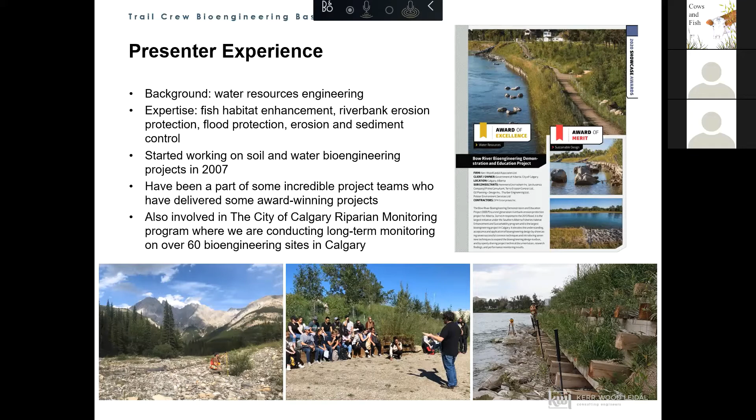I've also been part of some incredible project teams who have delivered some award-winning projects. An example shown up on the top right here is called the Bow River Bioengineering Demonstration and Education Project. I'm also involved in the City of Calgary Riparian Monitoring Program, where we are conducting long-term monitoring on over 60 bioengineering sites in Calgary.

Before we go further, let's briefly define what bioengineering is. A very simple definition is that soil and water bioengineering is the use of living plant materials to perform some engineering function. Typically, bioengineering is used for riverbank erosion protection or to stabilize eroding slopes.

So you'll note that I have soil and water bioengineering listed here, because if you search for bioengineering in Google, you'll get back a whole lot more of the medical side of bioengineering. So there's a few terms that are usually placed in front of bioengineering, such as soil or soil and water, that define it for what we're talking about today.

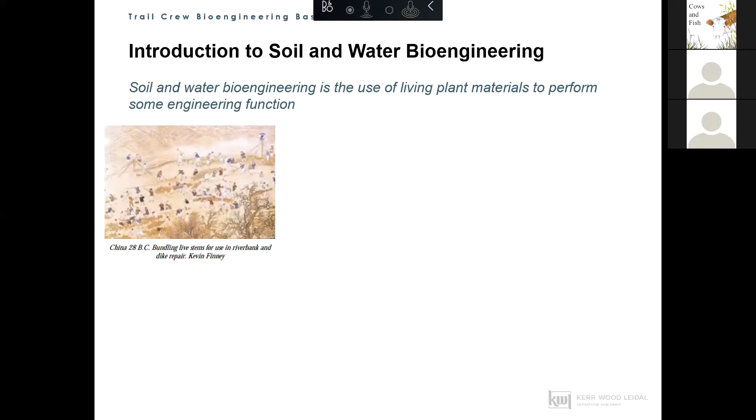It's important to note that bioengineering approaches aren't new. For example, Chinese historians recorded the use of bioengineering techniques for dike repair as early as 28 BC. Bioengineering has been documented in Europe since the 1600s. The Acadians were building bioengineering structures such as living dikes, known as aboiteaux dikes, and sluice boxes in the 17th century on the east coast of Canada. And there's documented use of bioengineering techniques in the US since the early 1900s.

So we're on a bit of a path of rediscovery here, where we again realize that the bioengineering approach helps us achieve the goal of reestablishing a native plant community that will provide permanent erosion protection and stabilization that can self-repair and regenerate and achieve habitat, biodiversity, climate change, cost, and aesthetic goals. Ultimately, a good bioengineering site will allow natural processes for recovery to take over.

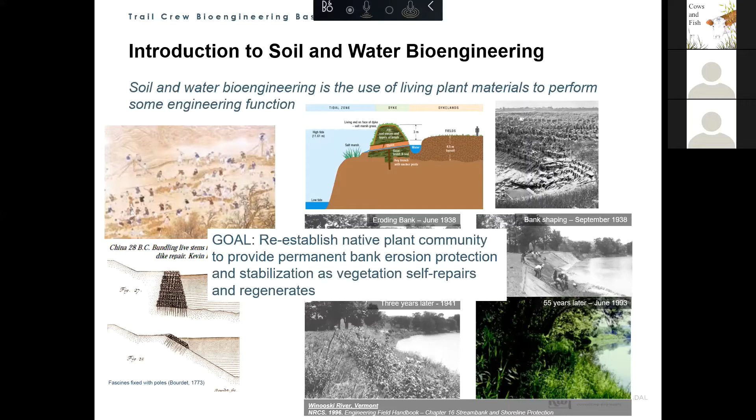I've done a bit of research into the history of bioengineering in Alberta. It's by no means complete, and you might have some names or events to add here, but I thought I'd share the key bits that I've learned so far. It appears that reclamation and restoration using bioengineering methods were introduced in the 1970s in Alberta. A key figure of this era was Nick Horstman from Western Canada Erosion Control, who was doing reclamation work in coal mining areas of Alberta.

In the mid-1970s, he developed a relationship with Dr. Hugo Schiechtl, who was an Austrian soil bioengineer and one of the most influential figures in the modern era of the practice. His writings remain some of the most important works in the English language. Dr. Schiechtl came to Edmonton to visit Nick Horstman in the late 1970s, and it was thought that they came up with the idea to translate some of Schiechtl's work and other important European soil bioengineering work into English. And this became Bioengineering for Land Reclamation and Conservation, which was published by the University of Alberta Press in 1980, and is a key text for bioengineering in the English-speaking world.

The pipeline industry was also an early adopter of bioengineering to repair watercourse crossings. A leading edge pipeline watercourse crossing course, a manual that featured bioengineering techniques, was developed in the early 1980s by the Petroleum Industry Training Service, and in part delivered by Pisces Environmental, that ran until around 2006. Attendees came from across North America to learn about bioengineering, and the course was presented to several large pipeline companies in the US and to the US Federal Energy Regulatory Commission in Washington.

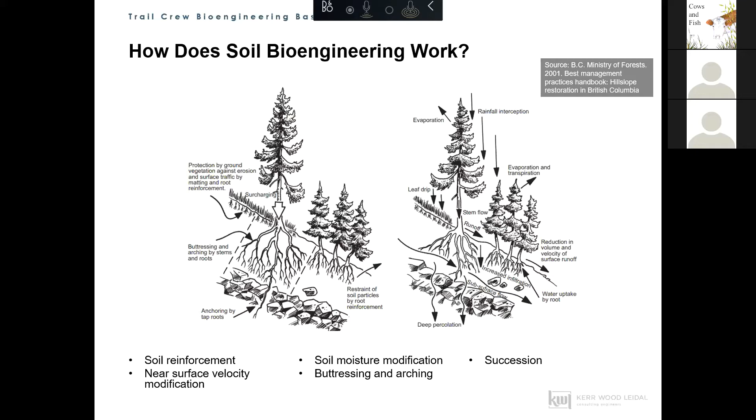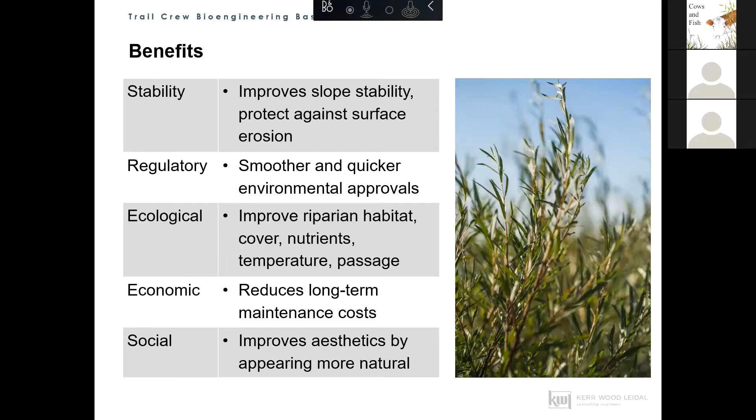With respect to regulatory processes, for someone who submits these applications like I do, this is an important consideration: bioengineering offers several advantages over conventional approaches such as riprap. Bioengineering has lower risk to fish and fish habitat, lower complexity of fish habitat assessment needed to support a regulatory application, a shorter duration of project review, and a lower amount of offset required by DFO. Additionally, some jurisdictions, such as the City of Calgary, require bioengineering approaches or justification as to why they have not been used.

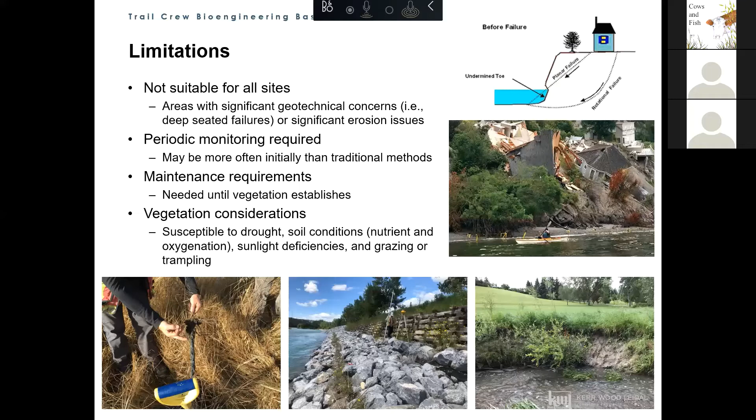And there's a soil cigar that was planted with live cuttings, with very low success of the live cuttings in that soil cigar. Grazing and trampling can also limit vegetation success.

So now that we've covered what bioengineering is and its benefits and limitations, let's discuss what we need to know about a site when planning a bioengineering project. Firstly, it's very important to develop a good site-level understanding of the conditions and processes occurring at a site, so that an appropriate solution can be identified that will properly address this erosion problem. There's nothing worse than spending a bunch of money to fix a problem to have the problem pop back up again.

So now, bioengineering project planning starts with having a good understanding of the objectives. So you might ask yourself, what is this project attempting to achieve? Is it stabilizing erosion in a creek or stream or on a slope? Or is it for habitat or riparian health enhancement? Is it aesthetics? Or is it mandated by a regulator? It could be a combination of all of these. Defining clear project objectives at the start of the project allows for the development of appropriate solutions, and then also allows to evaluate the success of that project at its completion.

So next, it's important to gain a good understanding of the site conditions and factors that could limit the success of a project. For example, what might limit the growth of vegetation at the site? Aspect, precipitation, soil moisture regime and groundwater seeps, existing vegetation and weed species, existing erosion, wildlife browsing or trampling, human or dog use, vehicles, boat use, etc.

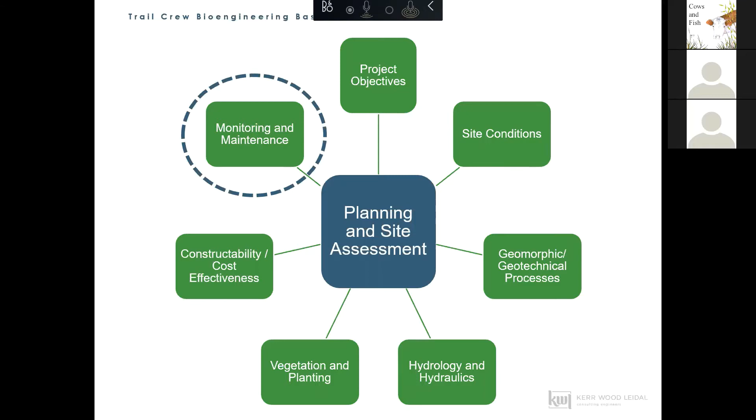I thought it might be useful to go over more specifics on what a site assessment should cover using the West Bragg Creek site that we're working on Friday as an example. So things that we'd want to document when we are looking at a site are, firstly, to confirm and verify the project goals. So for example, if the goal is to stabilize an eroding slope, it's important to verify that a bioengineering approach will work, or that it is needed based on how the natural system is responding to the disturbance.

The water flow patterns in the creek or stream or overland flow patterns, particularly the flow direction based on the site topography, and if you can get a sense of the volume and potentially the inundation duration. The presence of any seeps or groundwater issues should be noted. We'd also want to take a look at undisturbed areas to get an understanding of how they are functioning and possibly use our observations to support a design. Erosion features such as bank erosion, surface rilling, gullies, and slope instability and the potential causes should be noted.

Existing vegetation species and the distribution at the site, also noting the vegetation trim line, as mentioned previously, if the goal of the project is riverbank erosion. We'd also note invasive species and insect damage on the native vegetation that may be a concern for our treatment in the future. We'd want to note the aspect to observe how warm the site might be and also shading, potentially from buildings in an urban setting or existing vegetation in a more natural setting.

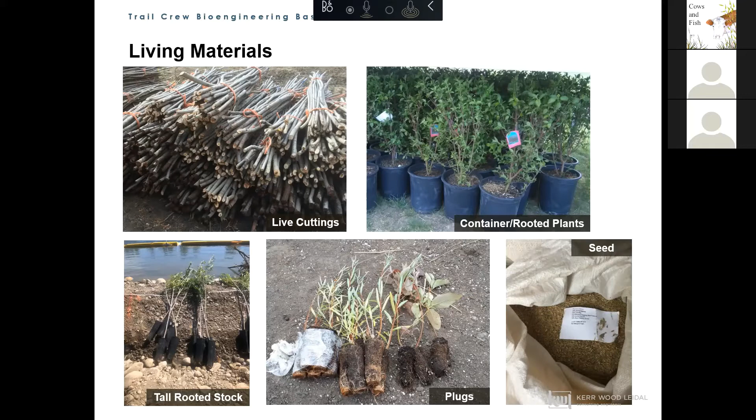So the most common species used in bioengineering are from the willow and poplar families. And the main reason for this is that these species have several beneficial properties for use in bioengineering. They grow in most moist soils of riparian areas and wetlands. They are resilient to high velocity floodwaters, burial by sediments, long periods of inundation, and high winds.

One of their coolest properties is that they root from cuttings, as I mentioned previously, because they have adventitious buds with flexibility to form roots when in contact with water or moist soil. So adventitious buds are buds that develop in an atypical place rather than at the branch tip or in the leaf axils. So along the stem, for example, as shown in the photo on the right here.

This strategy is super helpful in disturbance-prone environments such as riverbanks, where flooding or erosion or beaver activity can cause a branch to become dislodged or float away and flow down the river, where the stems can then readily root in the muddy riverbank. For bioengineering projects, we can use this property by harvesting and installing cuttings during the dormancy period, when the cutting has its highest amount of stored energy that can be then used to grow new roots and shoots within the growing season without the ability of photosynthesis. So that's super cool, I think.

But also, in fact, live cuttings have been shown to grow more in a year on average than container plants. Also very cool that some species can grow new plants by suckering from root systems. So they end up establishing in bare areas that were not previously planted, as shown in the middle photo here along the bottom. And in effect, that's similar to coppicing.

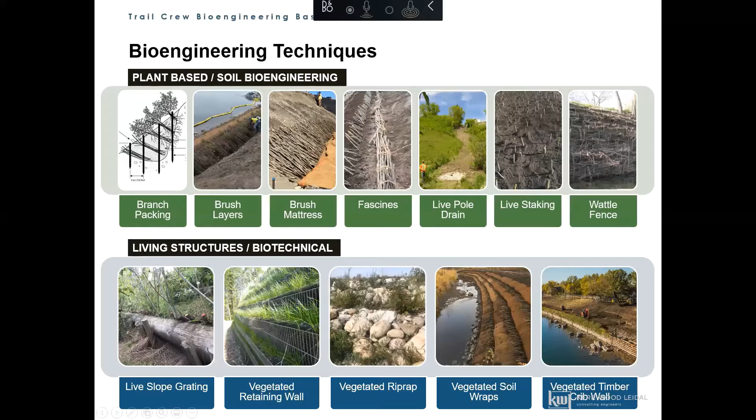Now, these numbers can then be compared to the analysis of expected velocity and shear stress at the site that are developed during the site assessment or site investigation, so that the appropriate technique can be selected. So of interest here is that a number of the techniques can withstand about the same velocity as a 300 millimeter average diameter riprap, which is about a beach ball sized rock or class 1 riprap. And some techniques provide about the same shear stress resistance as 450 millimeter average diameter riprap, which is close to a class 2 sized riprap.

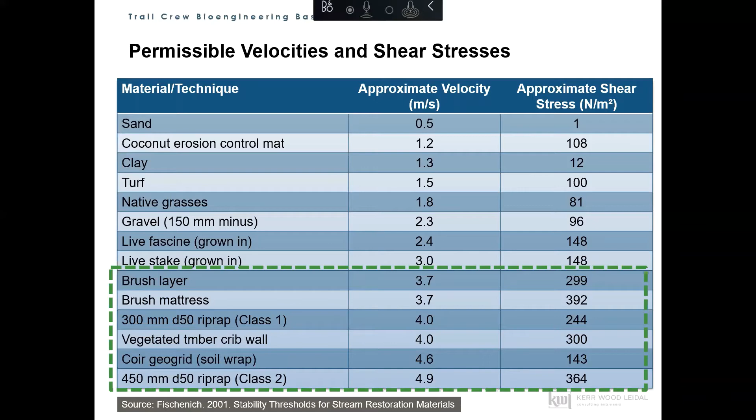While some guidelines say that you can pound the cuttings into the ground, my preference is to create planting holes with rebar or an auger and push the cuttings into the pre-made holes. And the length of the cuttings is typically 0.6 to 0.8 meters, where I believe we're using 0.6 meters for the West Bragg Creek project. This is one of the simplest bioengineering techniques, and it allows a deep burial of cuttings to access soil moisture. However, there's often a low survival rate that we are still investigating as part of the riparian monitoring program.

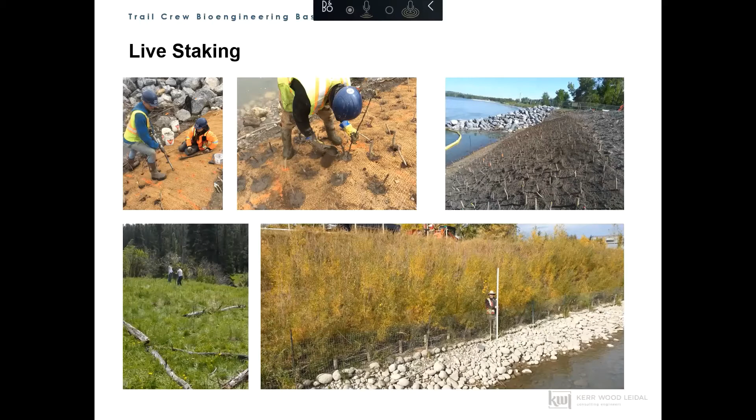The second technique that we're using at the West Bragg Creek site, this is at Area A, is brush layers. Typically, brush layers consist of dormant live cuttings that are placed in a crisscrossing or overlapping manner between layers of soil, with the tips protruding beyond the face of the fill. We are doing it slightly different at the West Bragg Creek site because to install a brush layer, according to what I just said, we'd have to excavate a relatively deep trench, and we are attempting to avoid any large disturbance or excavation for this project.

Brush layers are a very good technique for dry sites as the cuttings are deeply buried and they're between 1 meter to 1.5 meters long. So there's more soil around them to access moisture. Survival is typically okay based on the results of the riparian monitoring program at around 65%. One reason for slightly lower survival than a typical target of around 70 to 80% survival is that the angle of the brush layers was traditionally very flat at around 10%.

A steeper slope allows the cuttings to access deeper and likely more moist soils, such as what we're planning to do at the West Bragg Creek site, where we're installing them at a 1.5 to 1 slope. Also, sometimes the ends of the cuttings were extending beyond the recommended burial of 80% or 200 millimeters, and the cuttings were too exposed and were drying out.

For this technique, it's recommended to have a spacing of 10 to 20 cuttings per linear meter. However, I've seen anywhere between 5 to 20 cuttings. The close spacing seems to help the willows grow, mostly based on observation. This is total hearsay, but it seems that willows like to be planted in a community with close neighbors, which may be why the closer spacing for the live staking technique seems to work better.

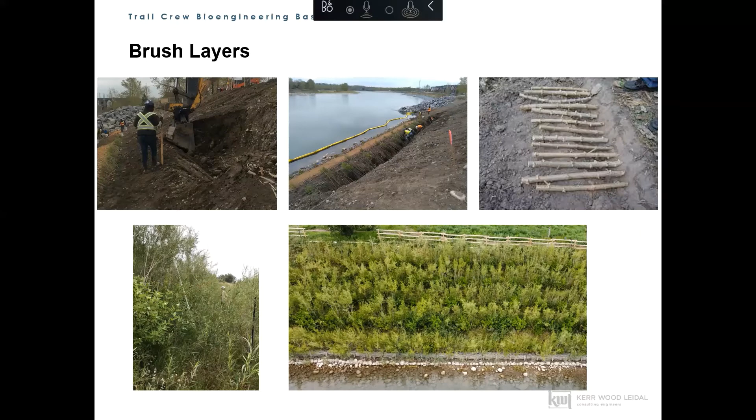The third technique is a fascine at Area 3. A fascine is a 2 to 3 meter long cigar-shaped 200 millimeter diameter bundle of live cuttings that is placed on contour. There's usually somewhere in the range of 10 to 20 live cuttings to make up a fascine. And then the cuttings are cinched together with a rope to make the cigar shape. And then they're placed in a shallow trench, covered and infilled with soil, and anchored in the trench using wooden stakes. The ends of fascines should be interlaced with the next fascine down the contour.

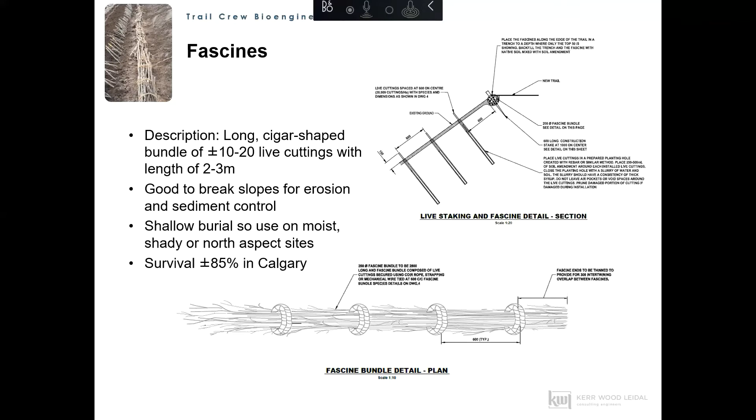They're used on slopes to provide a physical barrier that slows runoff and traps sediment. Then when the live cutting is established, the resulting vegetation helps to reduce soil moisture and provides further erosion protection. As I mentioned, they are installed on the surface, so they don't have deep access to soil moisture. So for this reason, they should be used on moist, slightly shady and/or north or the appropriate aspect. Based on the data from the riparian monitoring program, the survival for this technique is around 85% or so, which is quite good.

Unfortunately, we won't have such fancy equipment when we're working on Friday.

The final technique that we are using at the West Bragg Creek site is container plantings, which are being used as ground cover to control erosion, to provide habitat and enhance aesthetics. They're being planted up on the bench outside of the flowing water zone of the Bragg Creek. Plantings have a higher survival rate than live cuttings, at 95% versus 68% for live cuttings in Calgary.

So you might ask, why not always use container plants for bioengineering? The key reasons are that they are more susceptible to erosion than live cuttings, since their roots are buried relatively shallow compared to a live cutting. So they're typically not used in locations where there's flowing water. That's, as I mentioned previously, why they're located on the top of the bank here for the West Bragg Creek project. Also, a key advantage of the live cuttings is that they act a bit like soil nails and provide additional soil stability versus what a container plant can provide.

Plantings are typically more costly to purchase and install than live cuttings, especially if the live cuttings are harvested at the site, as in the case of what we're doing at West Bragg Creek. So one way of getting around the lower survival is to plant more live cuttings, since they are cheaper than plantings.

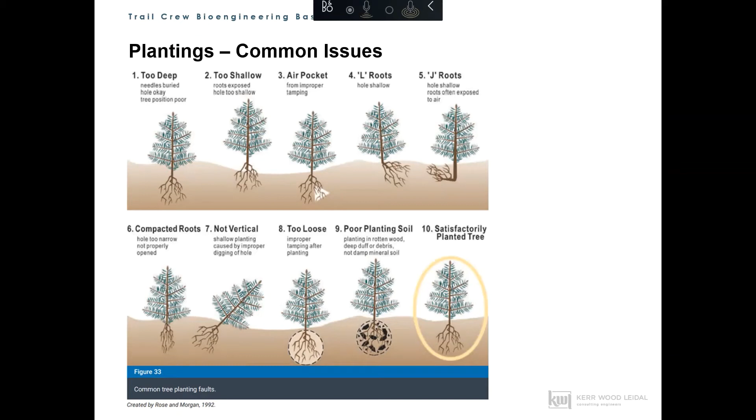Live pole drains are not a technique that is part of what we'll be doing at West Bragg Creek on Friday. However, it is a useful technique to know to manage excess moisture from a site. Live pole drains consist of a long cigar-shaped bundle of live cuttings that are oriented downslope. They use basically the same materials as a fascine, except that fascines are installed on contour, and the live pole drain is oriented downslope. They work by providing a preferential flow path for soil moisture, and then when the live cuttings in the bundle are established, the vegetation further reduces soil moisture through evapotranspiration. Live pole drains allow a variety of shapes, since they are constructed in a modular fashion, with each bundle or fascine about 2 to 3 meters long.

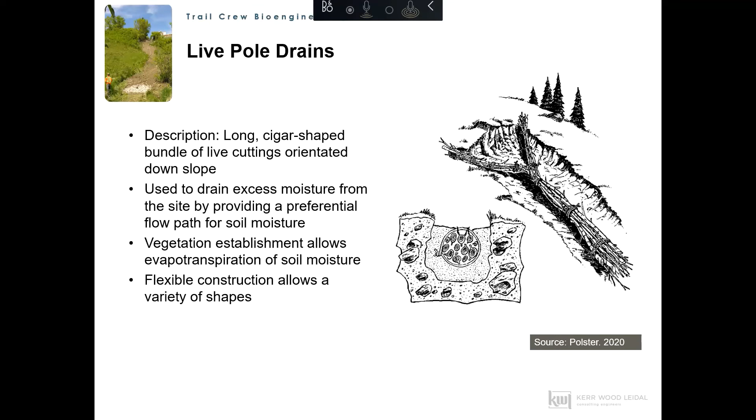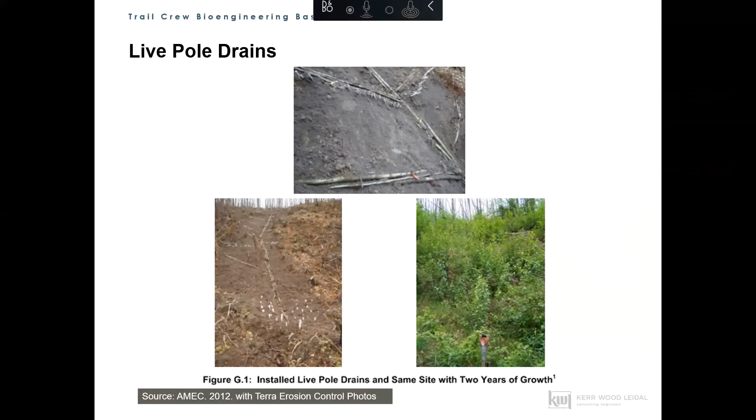Here's some photos of live pole drains taken from the City of Calgary Bioengineering Design Guidelines. The photos on the top and bottom left show the downslope orientation of the drain, and also some lateral drains that are connected to a main central drain. This illustrates the flexibility of the technique to cover a large area of moist soils. The bottom right photo shows the same site about 2 years after construction.

So the vegetation species that we selected for the work at the West Bragg Creek site were based on a riparian health inventory of the old Shell Road Bragg Creek reach that Cows and Fish conducted last year. The inventories that Cows and Fish produces are invaluable resources for designing bioengineering projects. And if you have access to one, definitely refer to it for your site.

Other resources to consult might be your biologist team member, the Agroforestry and Woodlot Extension Society Native Agroforestry Species Database, or the Alberta Biodiversity Monitoring Institute mapping portal. I'm sure that Catherine or Amy or other Cows and Fish staff or other attendees would have suggestions here as well.

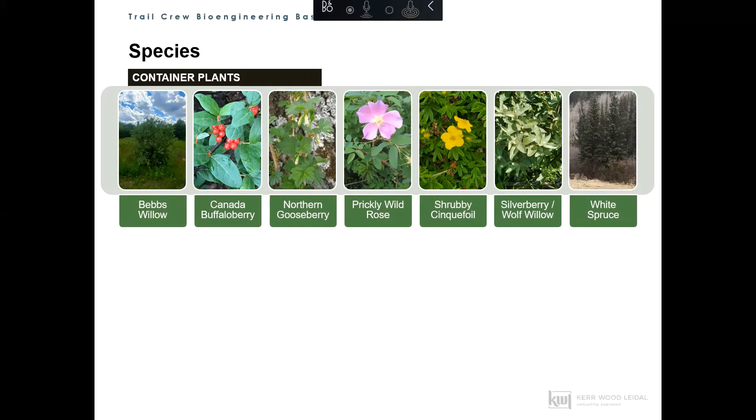So when it comes to container plants, the species we selected for the riparian planting at Area 1 were Bebb's willow, Canada buffaloberry, northern gooseberry, prickly wild rose, shrubby cinquefoil, silverberry, and white spruce. With respect to live cuttings, we'll be looking to harvest live cuttings at the West Bragg Creek site from native stands of balsam poplar, Bebb's willow, flat-leaved willow, and smooth willow.

And I'm excited here to be using two species that are new to me, the flat-leaved willow and smooth willow, to see how they perform from cuttings. We should definitely get the best results using the poplar, Bebb's willow, and flat-leaved willow, as they are all known to root readily from cuttings. Smooth willow may not have the same ability to root from cuttings, so we may limit the use of that species depending on what is available at the site.

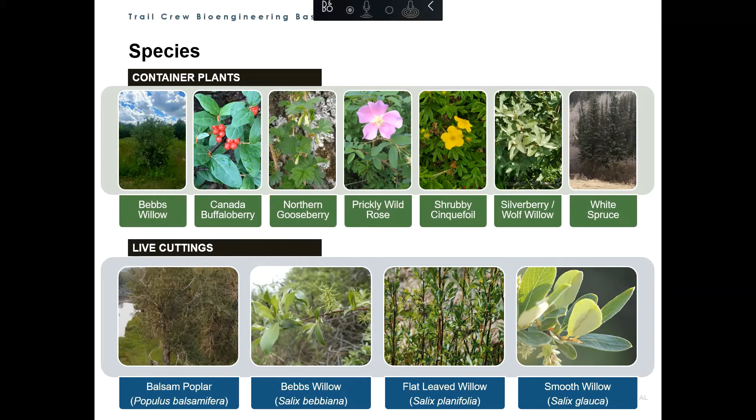The next few slides cover the best practices for live cutting harvesting, handling, and installation, and are basically the nuts and bolts for how to do bioengineering using live cuttings. So starting with live cutting harvesting, you need to obtain permits, authorizations, or permissions from the landowner if you're going to go out and harvest cuttings. It's incredibly important to harvest when vegetation is dormant, so during the dormancy period from October 1st to March 31st.

You want to harvest from sites with comparable site conditions, hydrology, landscape position, elevation, with similar species and healthy stands of native vegetation. You want to avoid rare or sensitive habitats. It's important to confirm the species prior to harvesting and store those species in separate piles so you know what you're going to be installing later on. You can also paint the tips, which helps to identify species and also to reduce desiccation post installation. This is optional, but it is recommended.

Choose healthy stems that are 1 to 4 years old with diameter between 2 centimeters at the tip, and we'll leave that to your imagination. No kidding, it's between 2 and 4 centimeters or so. Avoid diseased material and dead stems. You want to select relatively straight and smooth stems. Harvest at most 1/3 of the native plant. Do not ever clear cut your donor sites.

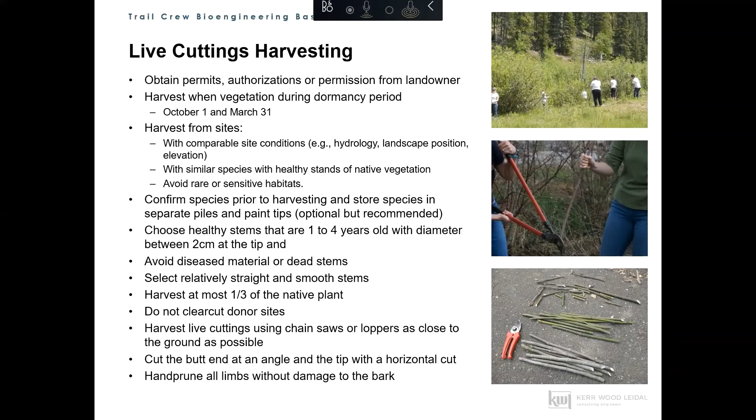You want to harvest live cuttings using chainsaws or loppers as close to the ground as possible with clean cuts. You want to cut the butt end at an angle and the tip with a horizontal cut, and then hand prune all the limbs off without damage to the bark. They should look like the picture on the bottom right here. Depending on the length, it could be quite a bit longer though.

For soaking, you soak cuttings in fresh, clean water for a minimum of 1 week to maximum 2 weeks prior to installation, or 2 days if pre-harvested on site, or install immediately after harvest. And it's important to submerge 75% or in that range of the length of live cuttings when soaking. And also to cover the cuttings on site and protect from beavers so they don't steal your materials.

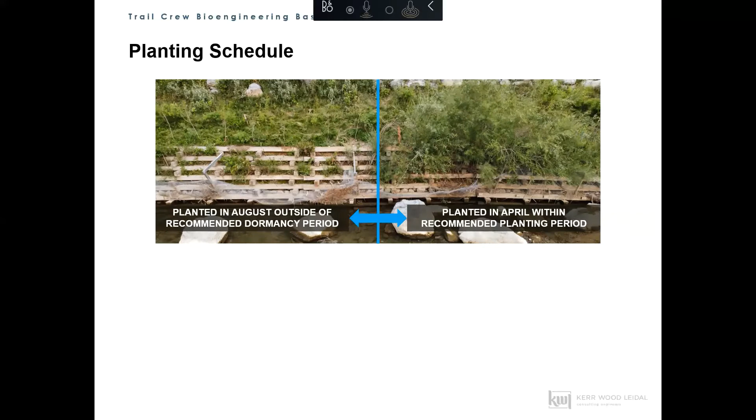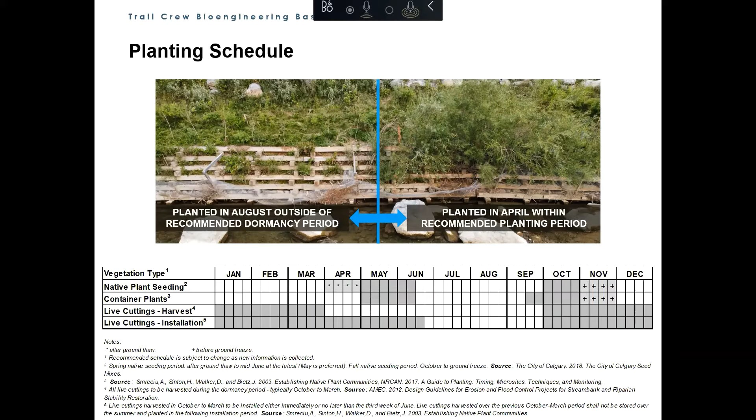So to further illustrate this point, we've developed a recommended planting schedule as part of the riparian monitoring program as shown in this table below. Recommended planting periods are provided for native plant seeding, container plants, and live cuttings harvest and installation, and most recommend to not plant within the mid-July or mid-June to end of September window. Planting outside of what is recommended here may be successful in limited circumstances, but there's significant risk of failure, and so limitation of work in this period is strongly recommended.

So in summary, plant live cuttings harvested in spring before the 3rd week of June. Plant live cuttings harvested in the fall, either in that same fall after soaking or in the spring after storing in cold storage over winter. Do not use cuttings that are harvested in the spring and stored over the summer for fall planting. That's a recipe for low success. Use tall pot stock as an alternate if construction is scheduled from the 3rd week of June to October. So there is some flexibility in that period between mid-June and September.

When it comes to live cutting installation, we want to create planting holes with a steel pilot bar, rebar, stinger, or hammer drill. We want to make sure that our live cuttings are in the ground at least 80% of their length with basal end first, and leave a maximum of 200 mils. Prevent stripping of the bark, damaging the buds, or splitting the cuttings during installation. You do not want to leave air pockets or voids around the planted live cuttings. So one way to do that is to backfill the planting hole around the live cutting with soil amendment, followed by a slurry consisting of topsoil and water with the consistency of thick syrup.

So as I mentioned previously, you want to leave a maximum exposed length of live cutting of 200 millimeters, and it's okay to trim them if necessary. If live cuttings are damaged during installation, including any cracks, you want to prune off that damaged portion of the cutting to reduce the occurrence of disease or pest entry. And then you want to water those installed live cuttings thoroughly.

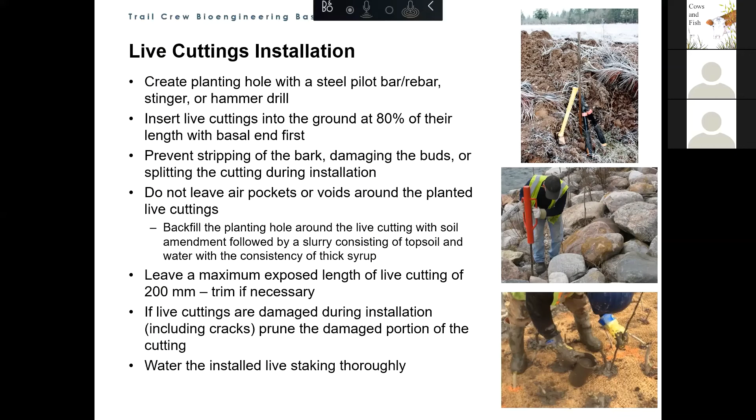So other key installation considerations that we've identified through the riparian monitoring program. For one, fencing for wildlife and humans has a statistically significant positive effect on the survival of live cuttings. Additionally, the use of soil amendment has a statistically significant effect on the growth of planted vegetation. Mean shoot length is statistically higher when soil amendment is used versus when it's not used. So what I'm referring to here in the soil amendment is the specific recipe that's found in the Calgary Bioengineering Design Guidelines that is composed primarily of peat or compost, 4-4-4 organic fertilizer, humic complexes, and endo and ectomycorrhizae. We're going to be using a different recipe for soil amendment at the West Bragg Creek project, which I'm excited to see the results of.

We've also identified that soil compaction has an effect on planted vegetation growth. We've found that the larger the depth of uncompacted soil, the larger the growth of the planted vegetation. This result points to the need for more care during construction so that equipment or foot traffic does not result in soil compaction, or the need to decompact the soil at the end of the project if equipment use is necessary. Irrigation has been observed to support vegetation establishment and is a must in Calgary due to the arid climate and the warm winter conditions, the Chinooks that blow through. Weeding of invasive species helps to remove the vegetation that could overwhelm a site and outcompete the desired vegetation for nutrients and moisture, effectively killing the planted vegetation. And now the same is true for high rates of seeding, which we've observed at several sites in Calgary.

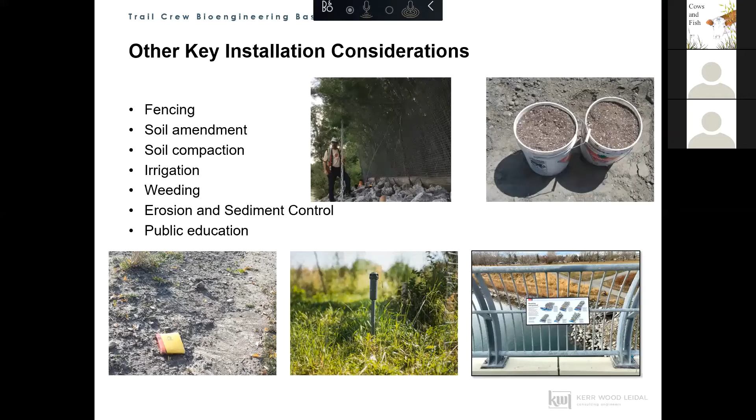Once construction is complete, the emphasis then switches to observing, maintaining, and correcting any issues at the site. A monitoring and maintenance program should run between 2 to 3 years post-construction to give the vegetation enough time to establish. A typical program would consist of irrigation, weeding, and minor repairs to fencing, erosion, etc.

As mentioned previously, fencing is very important through this time as it keeps wildlife, particularly beavers, out of the site, since it would otherwise be a veritable beaver buffet, and the plants aren't typically strong enough yet to withstand heavy browsing. But they're also there to keep humans, dogs, vehicles, etc. out of the site, since foot and animal traffic will compact soils and damage plants.

So now in summary, here are some key messages. It's important at the very beginning of the project to develop clear project outcomes. So an example could be that the objective of the project is to stabilize the site from erosion and improve riparian health. Next, it's important to understand the site and what is driving the erosion processes that are occurring. We need to select vegetation species that are native and local to the site that can root from cuttings if live cuttings are to be used.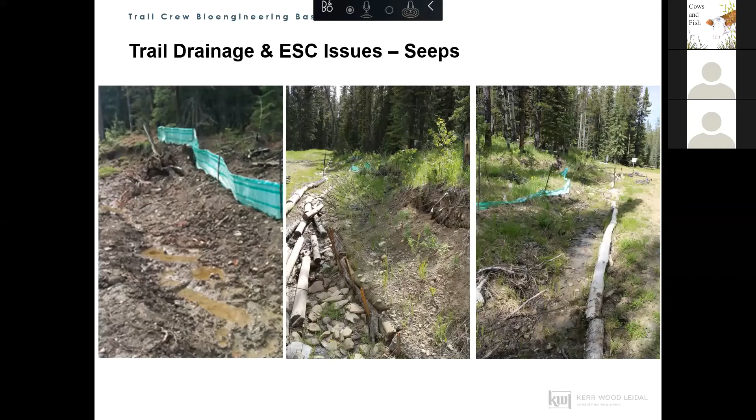Some other techniques that might be useful to consider at a site like this would be to place some rock at the toe of the bank to protect against bank erosion or toe scour if the stream bank has been disturbed or narrowed to accommodate the bridge abutments.

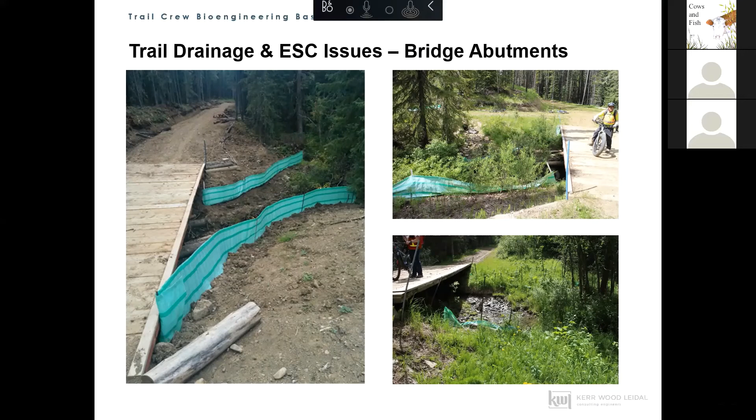Vegetated soil wraps with brush layers could be used to rebuild the bank if fill is being placed around the abutments, since the soil wraps are very flexible to construct to meet steep slopes or transition back to native or flatter slopes. Or perhaps a brush mattress could be placed on the native bank if the soils are exposed and the aspect is favorable.

A few other case studies that I've been directly involved with. This first is on the Elbow River in Calgary. There was moderate bank erosion here in the 2013 flood, but there was still quite a bit of native vegetation on the bank. So the purpose of the project was to stabilize the eroding bank and fill in this erosion feature up in the top right to protect an adjacent regional pathway and park area.

Our approach was to repair that small slumped area with a rock toe, then a brush layer and live staking above that. And then we put live staking to supplement the existing vegetation on the bank for about 80 meters upstream. So the idea was really to limit the disturbance to the existing vegetation that was well established and to fill in empty spaces with the live staking.

Between 3 and 5 live cuttings were installed in each planting hole, in an attempt to benefit from what I mentioned earlier as willow's preference to be planted with close neighbors. The terrace was also planted with native riparian species and fenced to reduce human and dog traffic. Overall, the brush layer did okay.

But there was high mortality of the live staking. And we attributed this to poor live cutting handling and storage practices at the site, where the live cuttings were left out uncovered, they were not properly soaked, and the planting holes were not properly backfilled. So there were large air voids and the cuttings dried out.

Also, the vegetation establishment on the bench is not great due to very high compaction. So at this site, while the approach to supplement the existing vegetation seemed to be a good one, the implementation at the site was not amazing. Also, reconsidering the site, I would have potentially used branch packing as the technique to fill in that slumped area.

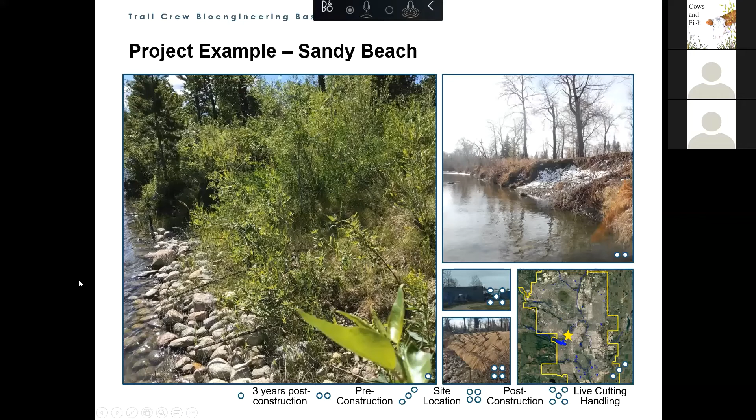The next case study is on Nose Creek, where an eroding bank was impacting an adjacent regional pathway as the pathway came down under a bridge. The goal of this project was to stabilize the bank and repair the regional pathway. There were 2 design approaches at the site. The first was a vegetated mechanically stabilized earth wall, or MSE wall, and the second was a vegetated soil wrap. Live staking was used in the MSE wall, and brush layers were used between the soil wraps. The bench above the bank was also planted with native shrubs and seeded.

The brush layers at the site are establishing very well, with about 3 cuttings per linear meter that are growing. The live staking in the MSE wall and the plantings of the bench aren't doing as well. There was a very high mortality of the live cuttings in the MSE wall, likely because the fill material in the wall was highly compacted and limited root growth. The reason for the high mortality of the plantings on the bench is not known. It could be lack of irrigation or heavy competition with the grass species there.

A key learning from this site was that the brush layers were a good technique again, because they were deeply buried and could access soil moisture, despite that the site had a dry aspect. Another key learning was that establishing live cuttings in a highly compacted backfill that was required to meet the specifications of an off-the-shelf product is next to impossible. And another approach should be used if this technique is used again.

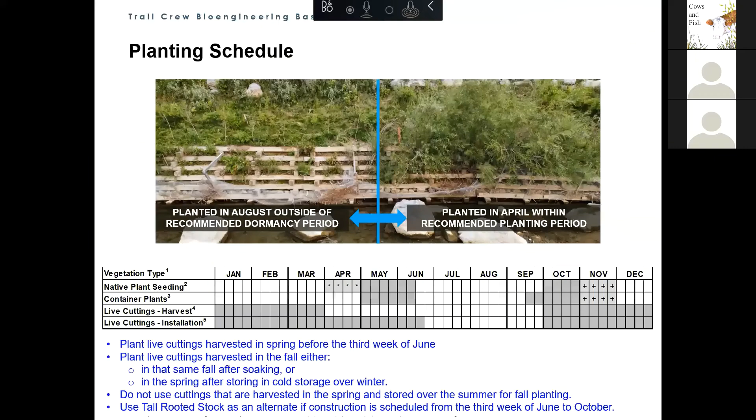Okay, good. So that narrow gap here, there's a very narrow spot between two rocks that the willow root made its way through, and you can see how small that piece of root is in comparison to the rest of the root. So basically what I'm trying to say is that observations of excavation of willows and poplars in riprap show that the roots will deform to make their way through narrow gaps versus maintain their same size and displace the rock. Hopefully that answers the question there.

Thank you, Mike. Next question, is there anything that can be done for a very steep and sandy bank?

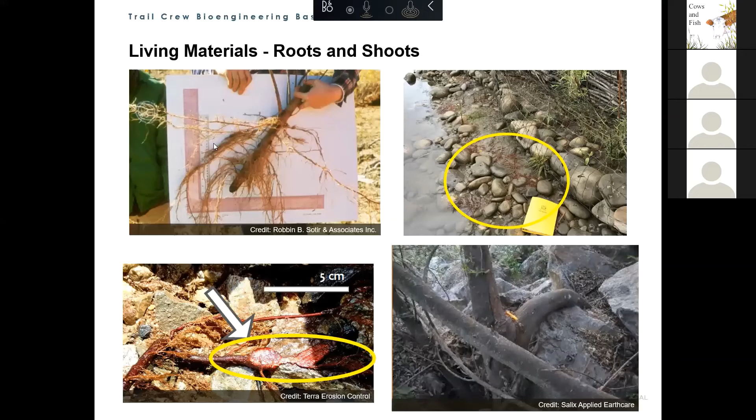Thanks, Catherine. Next question says, thanks for the presentation. Question about brush layering, specifically what's planned for the West Bragg project. How do we make a horizontal hole into the bank? How does one fill the staked hole with soil amendment when the hole is horizontal? I'm just bringing up the design plan here. We're not planning to build a horizontal hole, but if we were, that would be a real challenge to get anything liquid, such as the slurry, to flow into that hole.

We're actually planning to construct these on an angle, basically perpendicular to the bank as shown here, roughly a 1.5 to 1 slope. So what we're planning to do is pound rebar into the native bank, or use an auger, whichever is available on site. Pull that rebar out, put some soil amendment in that hole, and then put the stake in. Hopefully the hole is big enough and there are no snags as the cutting gets placed, and then backfill the rest of the hole with this slurry.

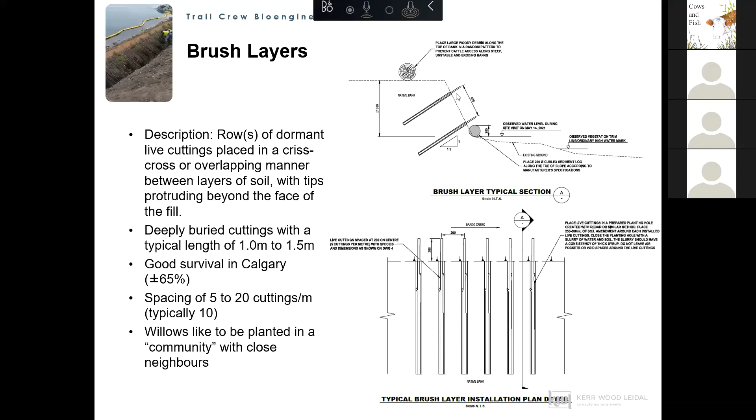So whether it's a spout on the jug so that we can pour the material in there and then poke it in with a dowel, or we use a funnel of some description to pour that material in there to fill those voids. That has been successfully done in the past for sure. Thanks.

Question: I'm wondering if you have planted stakes into the compost-filled socks. The short answer is that I have not done that before. I might want to know a bit more about what was proposed there. But at least for the compost sock I showed, the sock itself is a synthetic material. So typically I would like to see those removed once the vegetation is established and there's no longer a need for temporary erosion and sediment control. So planting through that particular material, I wouldn't necessarily want to do.

But if there is a biodegradable sock, yes, you could plant through that. One concern would be to make sure that you have enough of the stake deep into the native bank, the native material below that, since it's hard to predict what the temperature regime or the moisture regime will be in that compost sock.

So I would try to get as much as I could below into that native material, and rely on that for the growth, where the part through the compost sock would be more potentially a method to stabilize that compost sock in place.

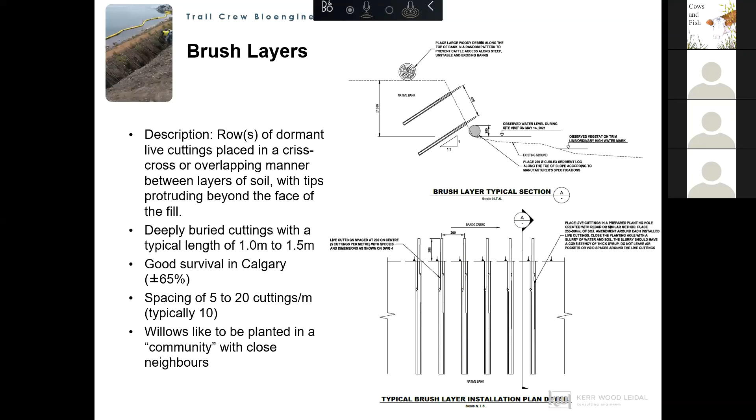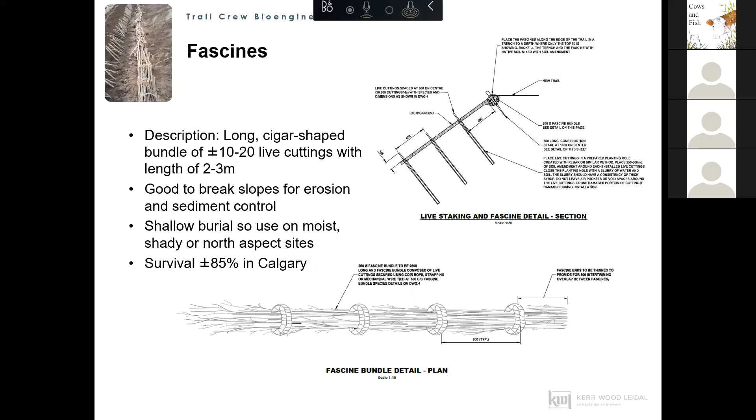Myself, I'm not familiar with the proper functioning condition assessment language necessarily. I would agree with Mike; when we're doing restoration projects we are looking for what we call a reference condition, a goal that you're aiming towards, so what we would call undisturbed. For Cows and Fish, we do use our riparian health inventory, or a more condensed version, the riparian health assessment, to communicate with ranchers, landowners or land managers the current condition of the riparian area, and then we can translate that into what that could mean for changes in management. Catherine, are you familiar with proper functioning condition?

No, I think it's just a language terminology thing, perhaps. Certainly when we do the riparian health inventory, essentially what we're looking for is to categorize a site as to whether it's ecologically functional. So a site that's ecologically functional would be categorized in a healthy condition versus an unhealthy or sort of not

properly functioning site. So it may just be a terminology thing, but our methods are available on our website, or we can certainly provide more information on that after the fact if you do want to find out more about our riparian health assessment inventories and what parameters we look at for that. Yeah.

Thanks, Catherine. And lastly, a question from Caitlin. Have you tried cuttings of red osier dogwood? And have you tried the Polster techniques of using stakes positioned in a tripod to establish shade for fish habitat?

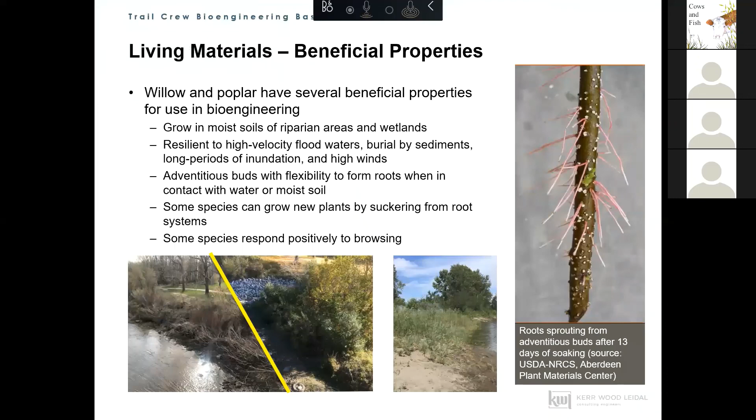I will say, Mike, that I think Trout Unlimited did try that technique with Dave Polster last fall in the Whitefish Creek watershed, and had very little success with it. Unfortunately, all the cuttings, like you said, dried and were desiccated. Yeah, I think we're operating in a very different climate from where those techniques may be successful. So perhaps in BC that may work. A lot wetter climate, but in Alberta it's a challenge because you've got much drier conditions. Mm-hmm.

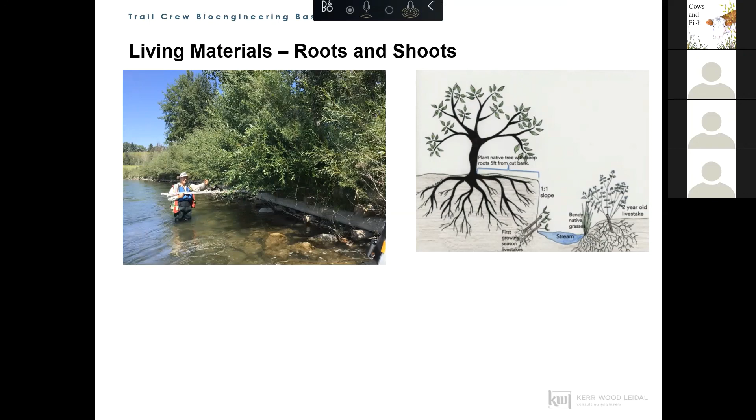And again, thank you so much to Jonathan and Catherine, who have been putting a lot of work into planning the West Bragg restoration project and coordinating these training sessions. They were also instrumental in organizing the volunteers. We've already done a little bit of work. You might have seen from my opening slides some pictures of the plantings that have been done already. I think it was around 500 or so plants, so that's pretty incredible.